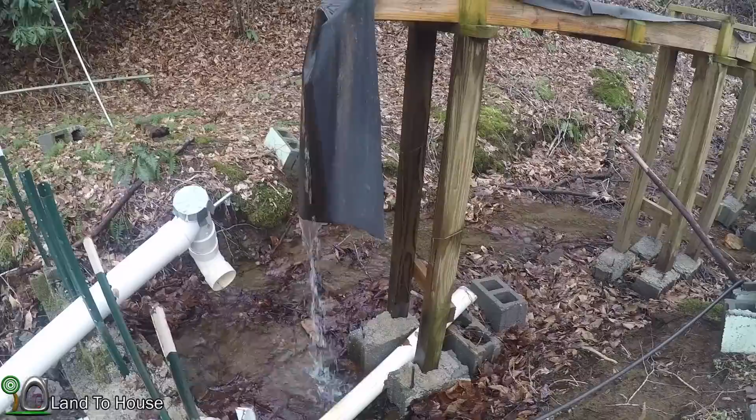Now there are a lot of things I'd like to do to this flume. Support the bottom a whole lot better than it currently is. I need to remove all this concrete that was a big waste. And the Archimedes turbine, I do want to continue to test, but for right now, it's just sitting here.

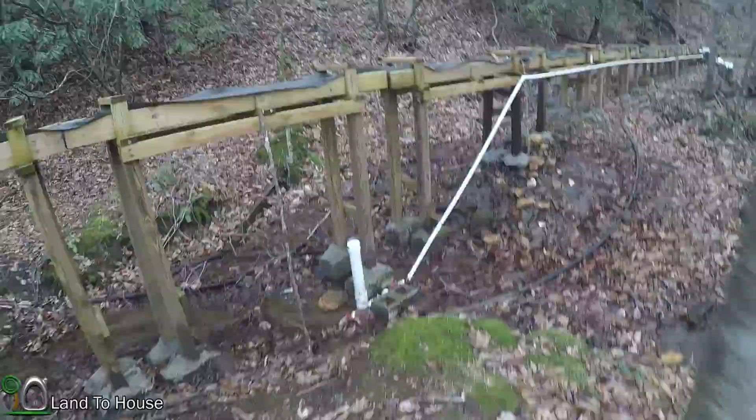Now, I discovered that leaves are a big issue with the flume. Let me show you what I mean. So, here's a good example right here, how this water is flowing over the top because of the leaves that have backed up. So that needs to be cleaned out real quick. And I usually just do that with a stick.

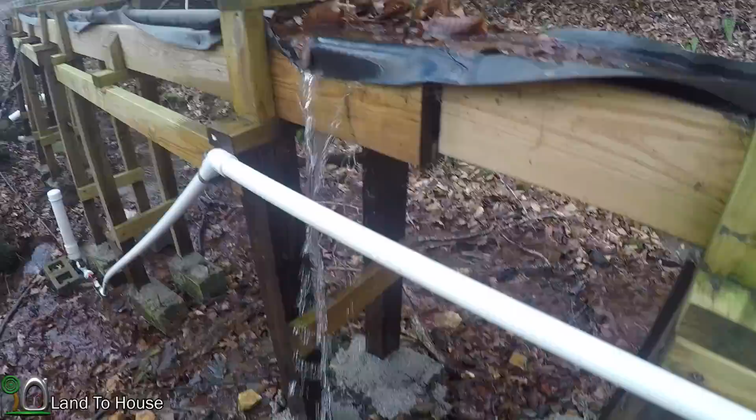Each of the bases needs to be reinforced significantly. Other than that, the flume seems to be of structural soundness and is doing well.

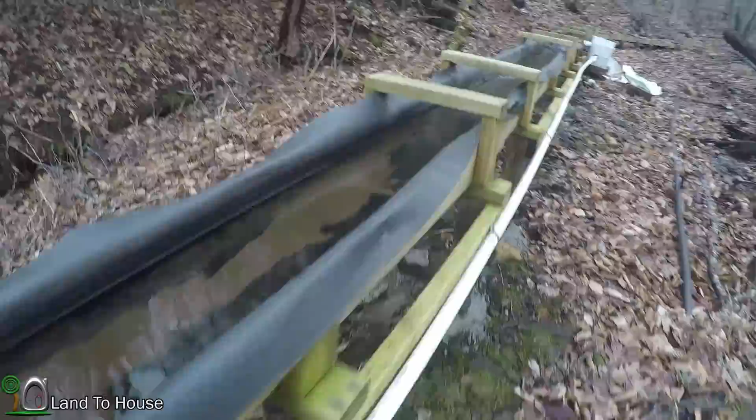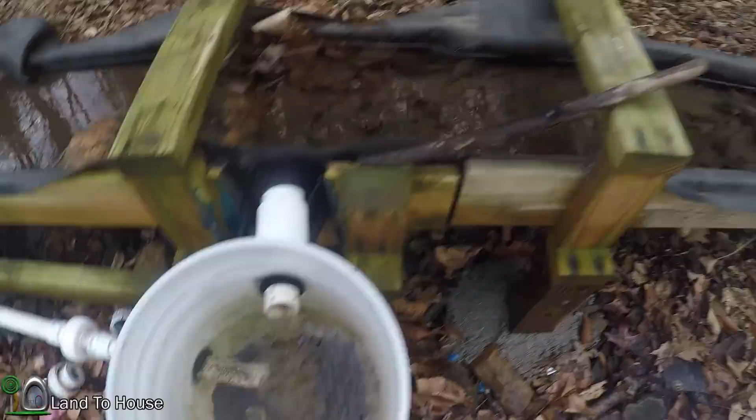And the ram pump bucket up here, I need to do some work on. Throw away a bunch of trash, but I think to keep this from freezing and causing issues, I'm just going to keep the bucket empty here. Okay, and yeah, see more leaves here that are certainly an issue. So doing well up here.

Now, the intake. You can see that it's pulling a decent bit of water, but look at all this loss over here and down here. What I'm going to do in the future is build a weir. And that's kind of a wooden dam. And I'll show you where that's going to go.

So there's a lot of loss here that could be going into the flume. But I found out quickly that this area over here is kind of a sinkhole marsh. So the water comes down, sinks into that area, skirts around, and comes out down over there.

And so I'd like to build this weir up here. So between that area and this fallen tree area here, and the water would build up a little bit and flow over in a designated trough area. And so that way I can then take the pipe and bypass that section and drop it off right here.

And that way all the water would be going into the flume, which, as you can see, after a decent rain is a lot of water. So definitely looking into that, and it will bypass this poorly constructed dam here as well.

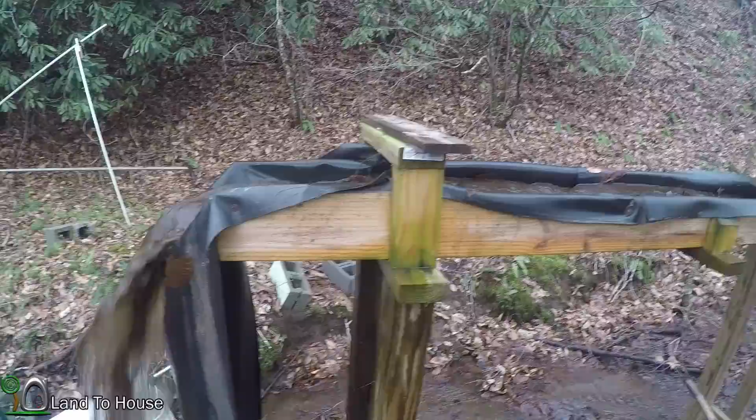So the other question that I'm asked about the flume is, why a flume? Well, the first thing I'm using it for, as you've seen, is the ram pump, which goes from the bucket down here. Gives it approximately 6 feet of head, somewhere around there. And that will be used later for the garden, which next summer I hope to really get that going, because I don't want to use the well water for watering the garden.

The other thing is, I would like to generate a small amount of power. Now, like I said before, there's a significant bit of water loss on both sides of the creek here, as you can see by that flow. And once I get that into the flume, I should have 60 plus gallons a minute, maybe up to 100, and that will be used to generate power.

So the Archimedes turbine was my first thought, but I'd like to take you inside and show you some plans that I was given from a friend of mine, and I think sometime in the near future I will be attempting to make that plan. So let's go inside and I will show you all of that.

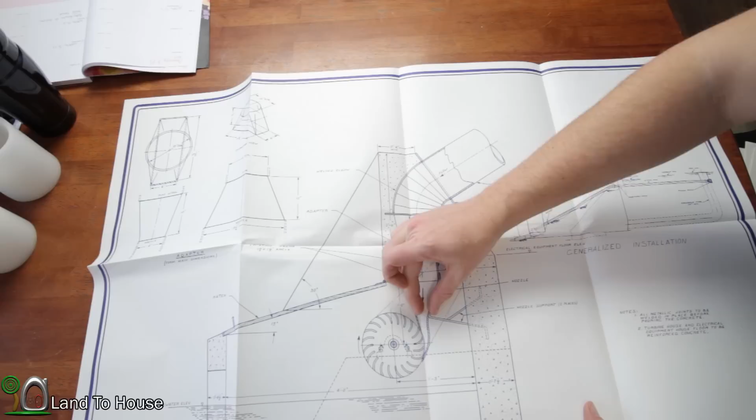Let's see. So basically the flume would be here, and it would pull water into this, and it shrinks down so that it kind of compresses that a little bit and then feeds this wheel. So I was thinking kind of do the same thing. I could maybe put a pipe on the end of that flume and then pull it down to a different size, just reduce it and let the water hit that wheel and really get things going.

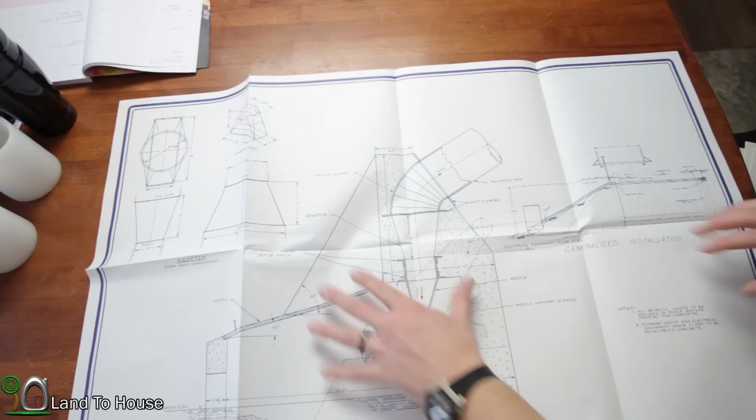So let's see, that's a pretty good view of the idea here. Let's see about another page. Okay, page 10 here. I think this was a side view, and that was really helpful to see as well. I'm not sure what kind of results I'd get from this. Okay, so basically what they're doing here is showing you pipe comes down, feeds to the wheel. It's got these flanges here on the side that support the whole thing.

And then what's cool is they also have the pulleys over here that will attach to the motors and the generators, step ups, all that good stuff. So it's really cool to have that as well. I've always heard that when you increase the size of the wheel, that you can hold more water and get more power off of that.

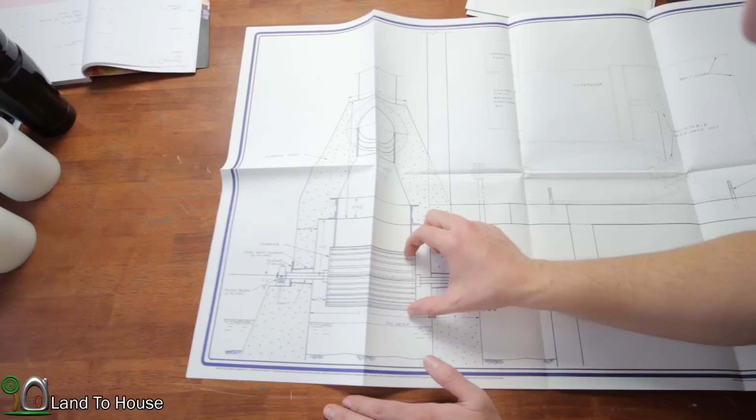So I'm kind of questioning if maybe I should build the wheel, maybe instead of 1 foot like this one is, more like 3 feet. So get more power off of that. But anyway, that's kind of the new plan since the Archimedes turbine isn't working out all that well. So that's the update on the flume. I'd like to have a water wheel out there generating some power.

If anything, just to get more videos out there, maybe turn on some lights and one day maybe bring some power to the tiny house. But of course, all my plans, life happens and they get set back. For instance, we just got 5 inches of snow, so it's going to be a little bit difficult to work on the water projects. And also, have to get that workshop done before I do much else. And Emma's on the way, so lots of things happening, but I do want to get back out in the water and work some more on the flume.